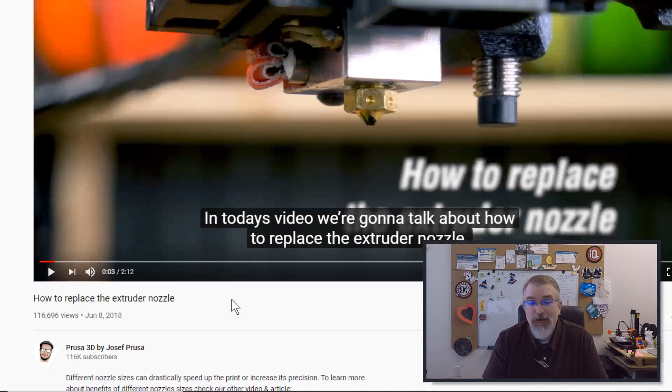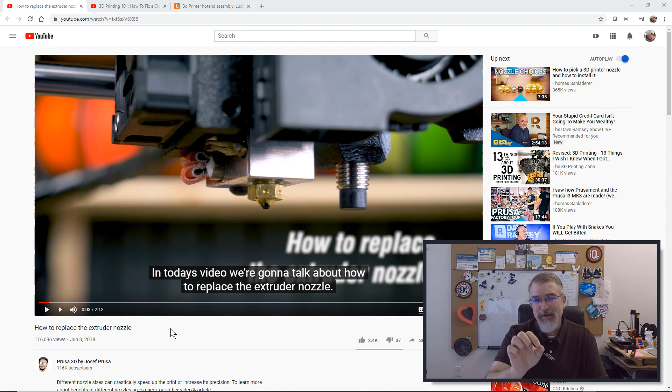Okay, before I go into this, let me show you some other resources that are out there. And one of the best ones you can probably find is How to Replace Your Extruder Nozzle by Prusa himself. So I'll put a link in the show notes here. It's a real simple, easy video, and I'll be doing most of what he's doing. He's got nice, crisp, clear views. So sometimes it's really nice to get a real good camera in there. They did a real good job. So you might want to go watch that video as well.

Another thing I'll be doing here at some point is doing a cold pull, and I'll go over that in a minute. But the 3D printing nerd has a nice video here on cold pulls and why you need to do that. So with all that, let me kind of go over what I am going to do.

So what I'm trying to do is I have my Prusa Mini over here. And I have my Prusa i3 Mark III that I just recently fixed the pulley on because I wasn't getting quite good prints on it. But I'm still not getting really good prints on the surface. And so I'm thinking there might be a problem with how the filament is coming out.

And for those of you who are new to 3D printing, here I have a little sketch of the schematics of the heater block and everything coming out of here. So just to go over how everything works, here at the top where your filament is coming in, there's this long plastic tube. In that plastic tube, we have this aluminum heat sink, aluminum fins that are trying to extract any extra heat that comes up.

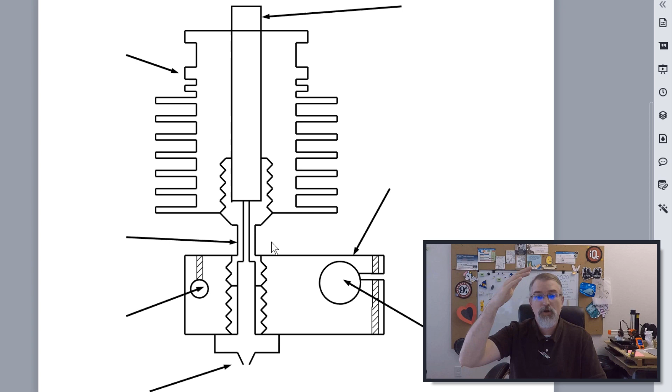And then attached to them, there's this little metal piece right here that has threads on either side. It's kind of like a little tiny thin piece, and that's what you see popping out there. And that's called a heat break. It's trying to keep the heat away from going up, making sure not so much heat is going up here.

And then down here is the heater block. You'll see this square aluminum piece down there, and that's where it tries to put all your heat. Now in the heater block, you have the nozzle screwed in down here. And you also have the heating element over here, that's the bigger knob. And over here you have a heat sensor, a thermistor. So it's trying to detect the heat, and this is trying to provide the heat.

Now, what can happen is, your filament is flowing through here just fine and coming out at an even rate, and everything is working well. But what happens if a little bit of dust or some specks get in there and get stuck, especially near the nozzle? That might build up a little bit over time, and it might not come out as well.

Now, right now, I don't really need to do a cold pull. Mine's working. Maybe I do need to do a cold pull. But I'm going to do a cold pull, and I'm going to replace the nozzle because I want to get it to a really nice state so that I can start comparing the Prusa Mini to the Prusa i3 Mark III side by side and see how they're doing prints compared to each other.

So in a cold pull, you would heat this thing up, and you could push the filament through, make sure it's coming out. And then at some point, and there's different methodology to this, I'll do what I've done in the past, but I haven't done it a lot. So you might want to look up some other people's techniques.

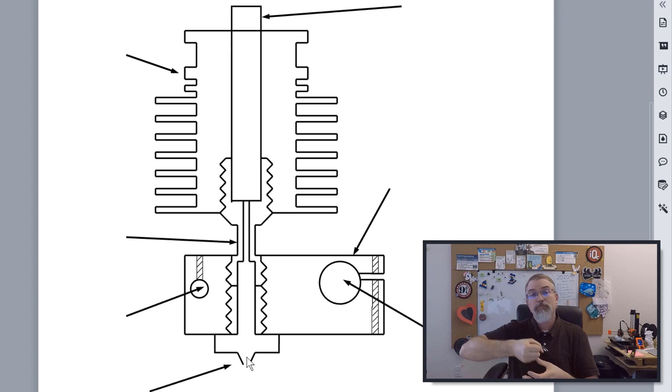But then you let it cool down a little bit to where it's more solid, but you don't let it cool down all the way. I've heard 100 degrees C or 60 degrees C. And then you do what's called a cold pull, or some people call it an atomic pull. At this point, it's fairly solid all the way down, and you pull it out. It'll hold on to any junk in there, and you'll pull it out. In fact, the end of the filament will be shaped like the end of the nozzle.

And that's kind of cool. I've done it once or twice. I haven't had to do it much. And it can clean the gunk out and hopefully clear things up. So I'm going to do that just to clean things up before I replace the nozzle. So I'm going to pull all that filament out.

And then what I'm going to do after that is I'm going to follow kind of what Prusa recommends, heat this thing up to 285 degrees, and then remove the nozzle. So to remove the nozzle itself, you need a 7mm socket wrench. And so I have a socket wrench here I just bought that I just used for my Prusa. And so I set it aside so I know that that's going to be right and be the correct size.

And then you can use a crescent wrench, but I was a little lazy, or I shouldn't say lazy, I'm paranoid because I had an issue. So I got a 17mm wrench that I just used to hold on to the heater block. Because when I first had my Prusa, and I have some videos out there, I was trying to replace the nozzle or do something, or I was still having issues with how I originally set it up. And so I was trying to take this whole thing apart to figure out what was going on.

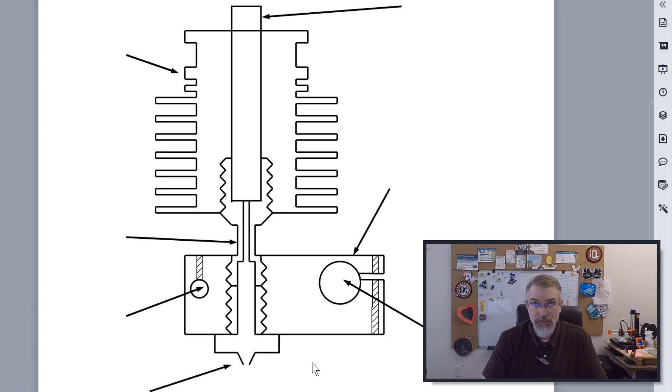And when I did that, I took not needle nose pliers, I took vice grips to hold on really tightly to the heat block. And when I did that, I accidentally squeezed my heat filament, or maybe it was my thermistor, and I broke all the wiring to it. So I just ripped it to shreds because I was being a dummy. And so I had to put some videos together showing how to replace that whole thing, which is not something you want to do.

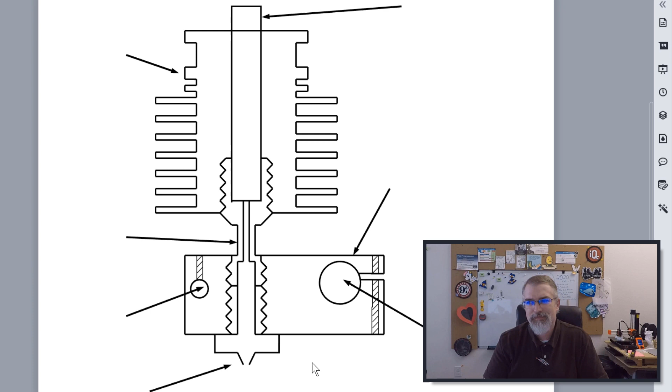So I use this now to gently hold on to it and kind of avoid that problem. You definitely don't use vice grips. A crescent wrench is fine, but either use a crescent wrench or just use a wrench that's the exact right size. And then once you heat it to 285 degrees, then you pull off the nozzle, put it aside, and put the other nozzle on. And it's just about that easy.

Now, with this, you need your nozzle. So I have an E3D V6 genuine 0.4 nozzle. If you go to buy nozzles, know what you're doing. If you're just starting to fiddle with it and you don't want to do any special changes, make sure you get a 0.4 millimeter nozzle. They have nozzles with different sizes, so they go higher and lower. The smaller they are, the finer print you can do. And the bigger they are, the faster but less fine print you can do.

But when you do that, you need to make new G-code files to account for it. So if you don't want to do anything, stay with the 0.4. If you want to go to a different size, that means you can't print the same prints you've been printing. You have to re-slice them into a different G-code that can account for the fact that you have a different nozzle size. So with that, let's go out in the garage and get this going.

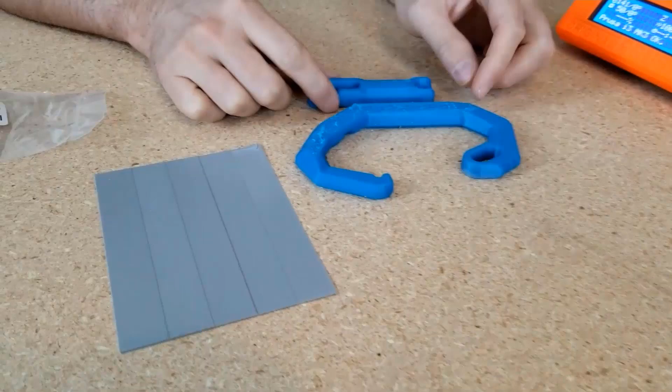Okay, so aside from getting the Prusa up to speed, I want to get the i3 Mark III in a good state, like I said, to compare to the Prusa Mini. But to show some things that have recently happened, I did go to print this recently, and I had this failure. You can see how it stopped off. Now that might be symptomatic of it not coming through quite smoothly.

Probably not, because what happens is at the top here, in this example, we've got 2 gears, and it's pushing that filament through. And so what could happen is if all of a sudden something stops it and it can't push through for a second, the gears will keep moving, and it will start to strip the filament from the sides. And once it strips enough, then it has nothing to grab onto. And so that's what occurred here, it's trying to push stuff through and it couldn't.

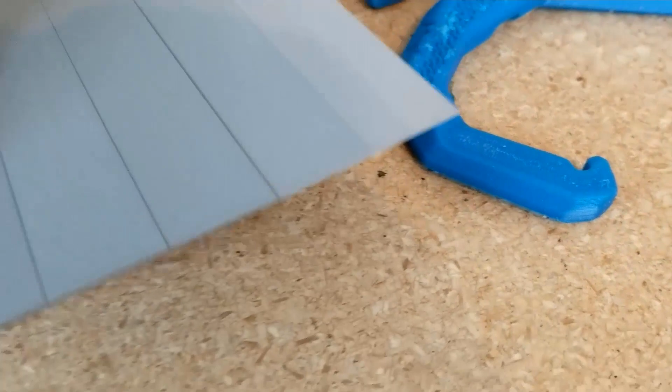Another thing that happened, and this is really hard to see because this is a strong B as far as quality. It's doing really fine. So I did this little print because the surface hasn't seemed quite right to me recently. If you look, you can probably see here, the surface might be a little notched when I'd rather have it smooth. It's probably really difficult to see because it's pretty good, but there are spaces here where it's not quite as evenly covered.

So you might be able to see that. I don't know how well it would show on the video, but it's good, it's not perfectly nice. So hopefully this will fix that too. That's another reason to do it all. So with that, let's start doing this cold pull and get it running.

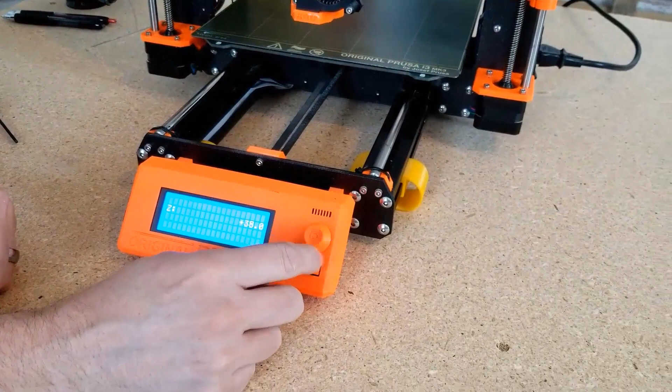So I've got my Prusa, I need to, Prusa i3 Mark III. So I'm going to preheat it and get it on PLA. And one thing, if you're new and don't know this, if you push and hold down this button, now you have your Z-axis controls. And so I can easily maneuver this and get it up. In this case, I want to get it up high so I can get to things easier. Now be careful going too high because it still keeps going as it goes up. So I'll get it about there.

And then now I will load it, which is going to take a few seconds as it heats up here, because I want to push this current filament through. And then we'll do a cold pull, atomic pull. But again, probably watch some other people's videos because I don't do enough of them, so maybe some other people have better techniques. Okay, press to load, so we're good now.

So now we'll press. I've already done this before. I just want to make sure this is coming out. Looks like we're coming out just fine. Because I want to make sure it's all through there so we can pull it out really well. So now it should ask us if it looks good in a second. Okay, we'll say yes.

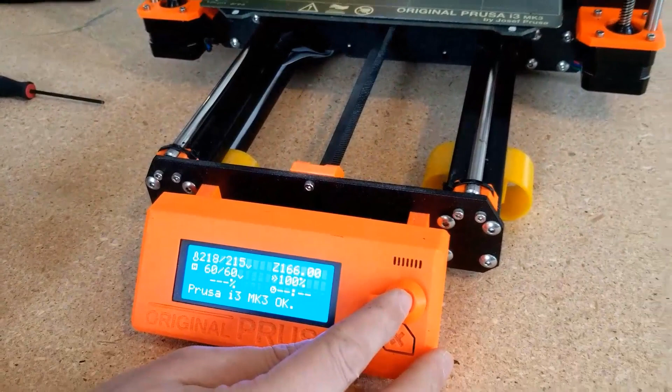And what I'll do now is we'll go to that preheat. We're on the PLA, so I want to stop the preheat. Easiest way, I'll just hit the cancel button here, which is going to reboot everything. And so now it'll turn off its heat. And now I want to let it cool down a bit. So we can see the nozzle now is 218 degrees. And so I'll come over here and I will cut this. And I want to let it drop because right now it's still hot on that hot end.

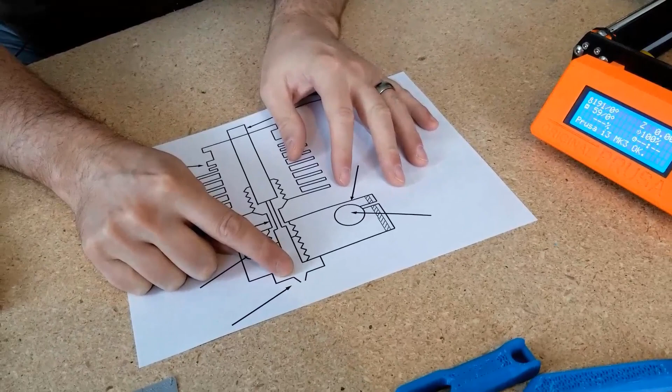I can show you my little printed out drawing. So right here towards the end, this is all liquid goo, so it's easy to push through. But as you go further up, especially all the way out, it's not goo at all, it's filament. So it goes from solid all the way down to liquid here, getting gooier and hotter the further it goes down. So we want this all to cool off, but not quite to a solid, because if it's really solid, it'll be harder to pull out.

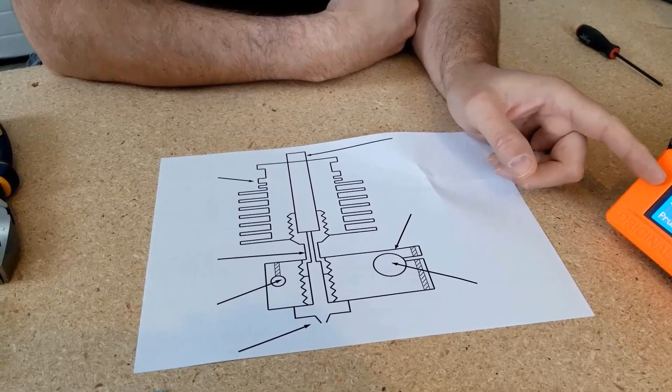But I've heard different people say different things. I've heard 100 degrees C, I've heard 60 degrees C. Last time I did this, I think I did it at 100 degrees C. And now I'm actually in the garage. It's a cold day here in Colorado, so I normally don't run my printer in the cold garage. Don't do that. I just needed a place to do this demonstration. But you can see mine's dropping pretty quickly because it is a cold day.

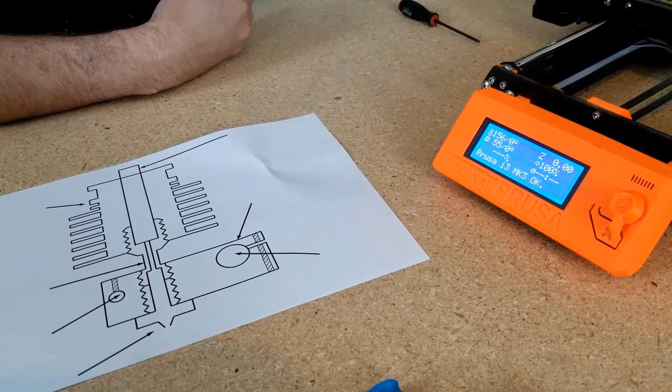But once it hits 100 degrees Celsius, I'll probably give it a moment, and then I'm just going to pull this whole thing out. It'll be solid at the end, but it should be a little softer, so it's easier to pull out. When I pull it out, you should see roughly the shape of the end of the nozzle. So the end of this will be pointed, and if there's any gook in there, you'll kind of see gook on there.

Now, I've seen videos where people actually run it multiple times. I've also seen some videos where people use clear PLA or PETG so they can really see the color of the gook coming out. I haven't done that because my main point is to just clean it out a little bit and then replace the nozzle completely. So there we are, 128, still going down.

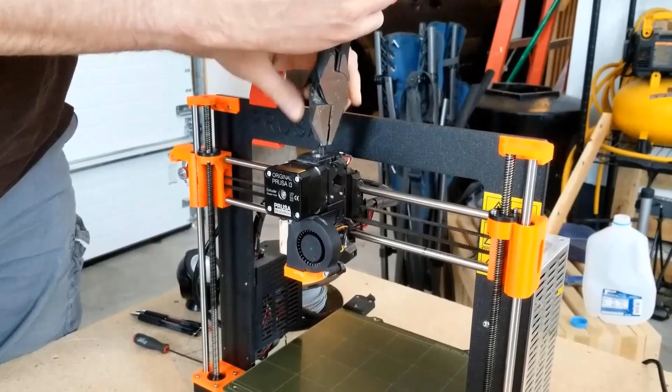Okay, there we go, 100. So we'll see how well we do on this. You can probably pull it by hand, but I'll just get this on here, and yeah, it's pulling pretty easily.

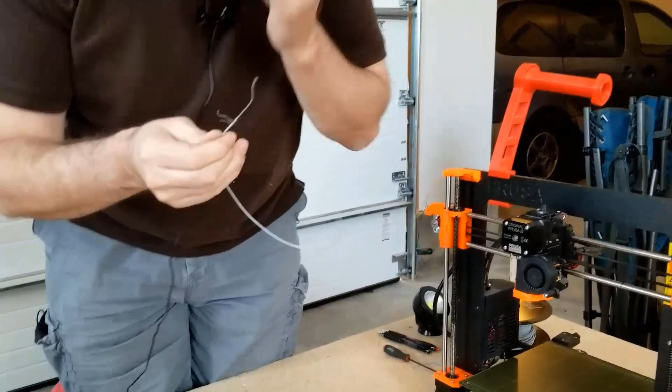There we go. And see how it does on its shape there. Let's see, I do a white background here. And so you can see, there's the end. Now, yeah, it might make a little more sense to do this in a clear plastic so you can see the color change if you really want to get the gunk out.

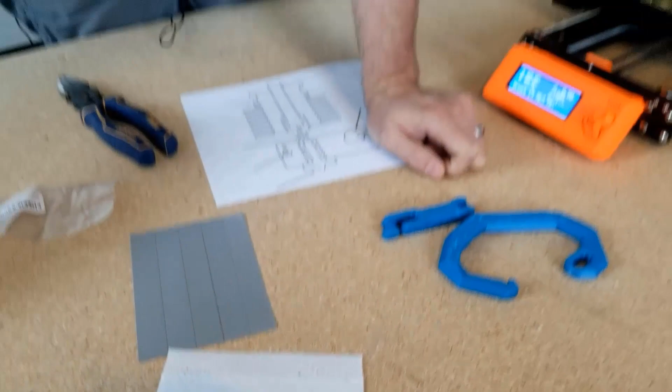But you can see I've pulled, it's retaining the shape that was down there. So it should be pretty clear now. And if you're worried, you could repeat this process. Now, in this case, I'm replacing the nozzle, so I don't really need to repeat the process. So, with that, let me do some of the next things to replace the nozzle.

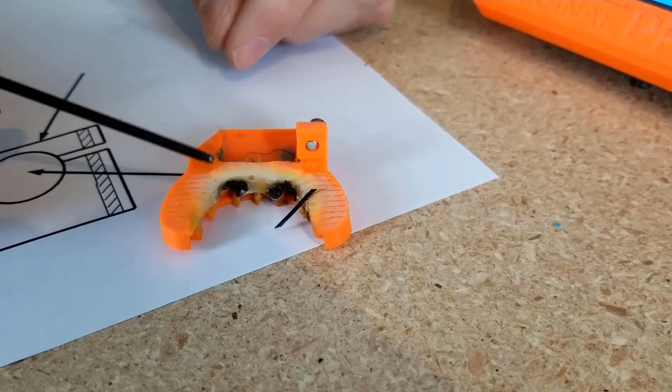So first, I'll take this guy off. This little fan here. The fan redirection. Of course, be careful because my finger here is next to something that's still 80 degrees Celsius. And this probably needs to be clean. I probably should print a new one. That one's looking a little ugly over the years. So, probably a good idea to reprint another one of these. Yeah, it's ugly. It needs a new one. But for now, I'll keep using it.

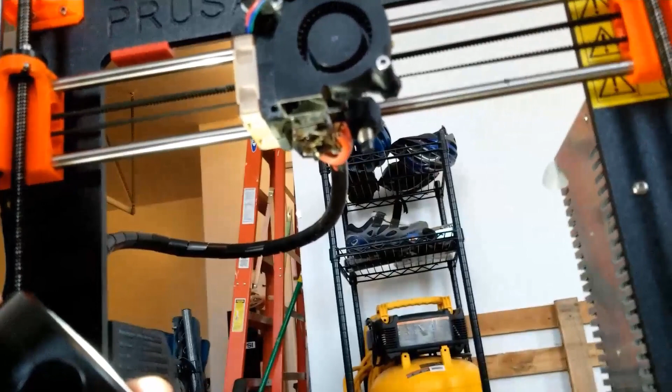So now, if we look under here, we can see here is the heater block. I know it's a bit ugly underneath there. Might be going to get an additional light. So it's been uglified over the years, but it's still functional. Now, if you need to, you can replace the whole thing. And you can see the attachment. Let me get on this side so I can point it out easier.

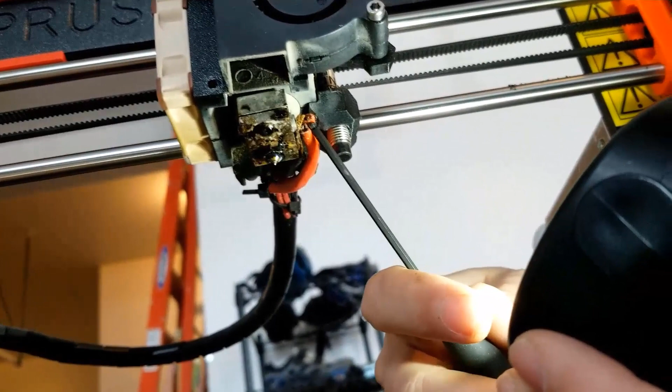Over here, you can see all the wiring. So this big mama jam over here, that's the heating element. Here we go. So this is the heating element. And then behind it, there's a smaller hole on the back side that I showed in the image that is the thermistor. You want to stay away from these guys because if you break them, it's not something you can easily resolder because it's hot there. So you just have to replace the whole thing, which I did once. So don't be a dummy and break things like I did.

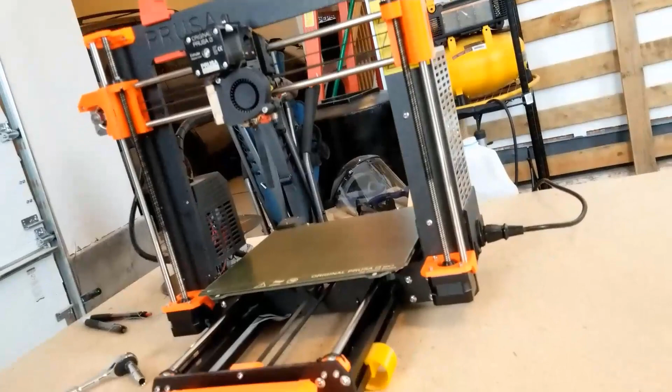Oh, there you go. So now what they suggest is they want to heat this up. Let's see, settings, let me go back. Okay, so now Prusa is talking about setting this to 285 degrees. So I'll go to settings, temperature, nozzle, and pump that up to 285. That's Celsius? Yes. So for us American people, that's hot. And so I'll go back to main, go back to info, and we can see it's heating up.

So we'll wait for it to get to 285. When you take this off, this will be 285 degrees Celsius. So if I put it on this paper, it'll probably burn a hole in the paper. So you can probably grab a tile. Let me see, do I have anything nice and metallic around here? Should have thought of that beforehand, but while it's heating up, I will go find something in my garage that's metallic and big. Ah, there we go.

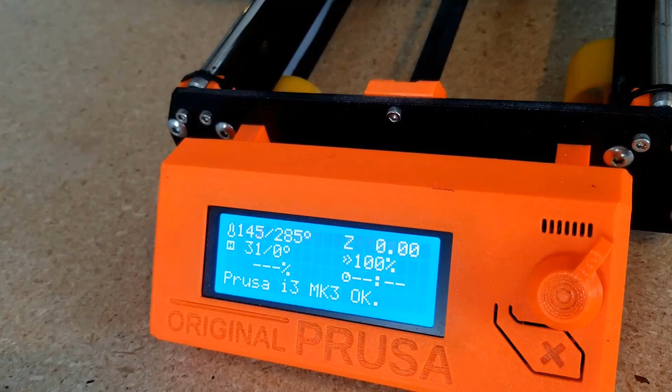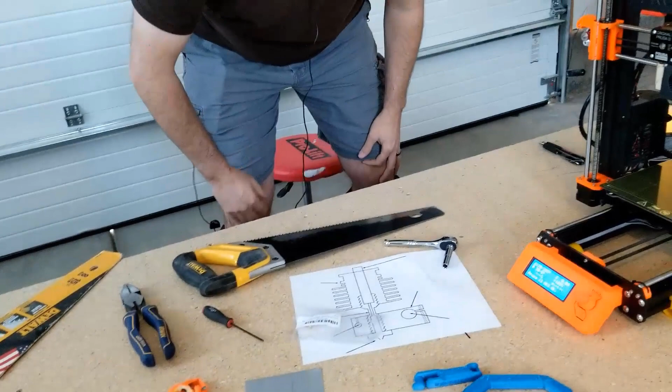I'll use an old junky saw. That'll work. Here we go. I have an old junky saw I can place it down on. But it's so small that I could probably put it on this wood and it would be okay. But if I threw it in a bunch of sawdust, I might have a fire all of a sudden, right? So play it safe. I can take it out, but it's obvious which one's which, because this one's nice and clean. So there's that one.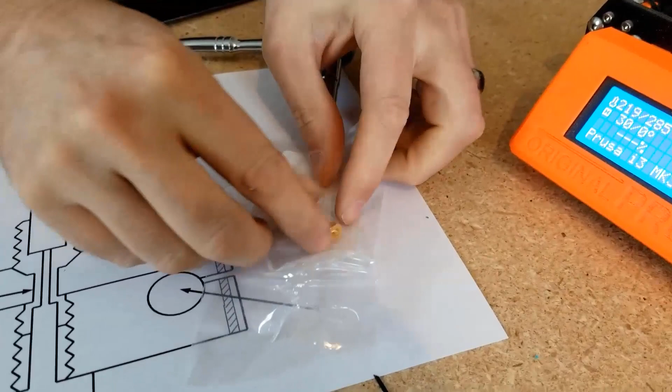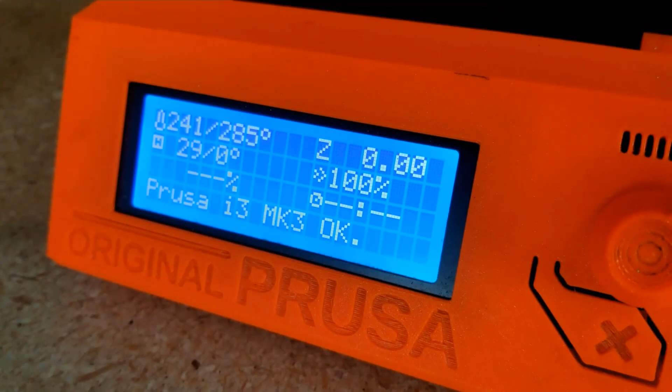And now when you put the new one on, you don't want to crank it on super tight, you want it snug. If you get it on there too tight, it pushes up against this heat break and you could do some damage. So you want to get it on there snug, you don't want to just wrench it. Okay, 271, we're almost there. Okay, there we go.

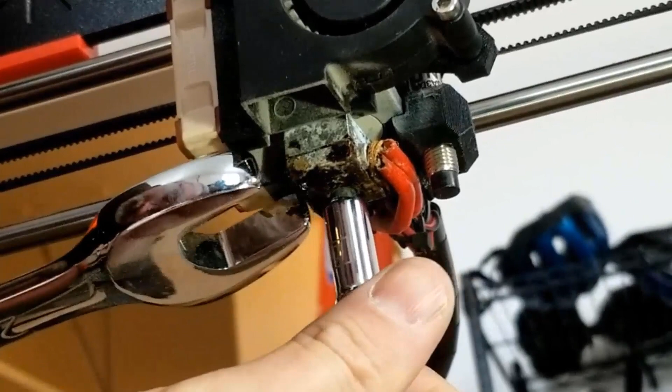Now for me, I didn't want to mess with this because I did such a bad job on it years ago that I have this 23mm wrench, like I mentioned before, that is the exact size that I can put over here without having to use a crescent wrench. And remember, everything in here is really super hot right now. So if it drops, get your hands out of the way. I need to get a better light. Okay, and we are out.

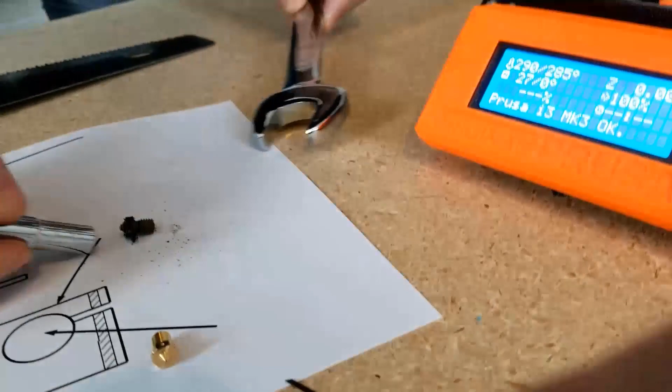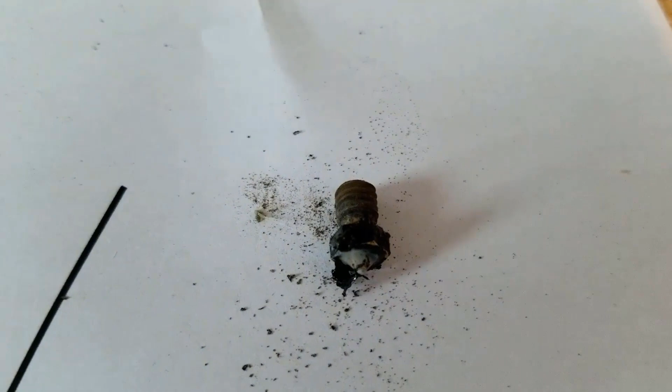There we go. Don't touch it. Oh, I put it on the paper like a dummy. But again, don't do what I just did. I should have put it on the metal. That'll probably leave a burn mark. Okay, yeah. Hold on, let me get that up here. My fingers.

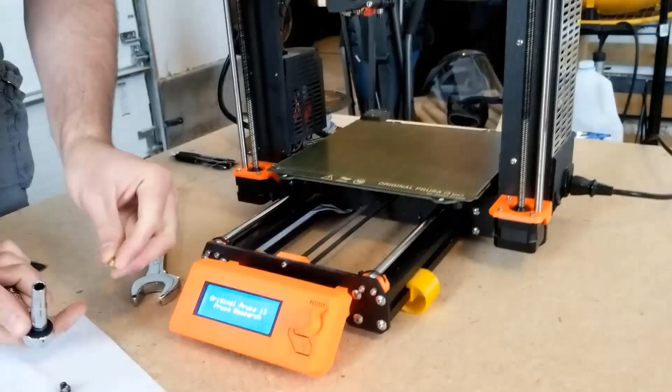Now, I need to, well, my socket's too deep, so I'm about to do something dangerous. What you should do, okay, maybe I should not do this dangerous. I will go here and hit the cancel button. My socket, see, my problem right now is my socket's so deep that if I put it in there, I can't start it. Once it gets started, I'm okay.

So you're going to cool it off and start it? I'm going to cool it off. You should get a shallower socket or cool it off all the way. I'll cool it off to a reasonable thing, well, it's like touching a stove. If I touch it right now, I'm going to burn myself pretty bad, but it's only going to be my fingers and I'm not going to die. But you don't want to burn your fingers, right? So let's do the responsible thing and not hurt ourselves.

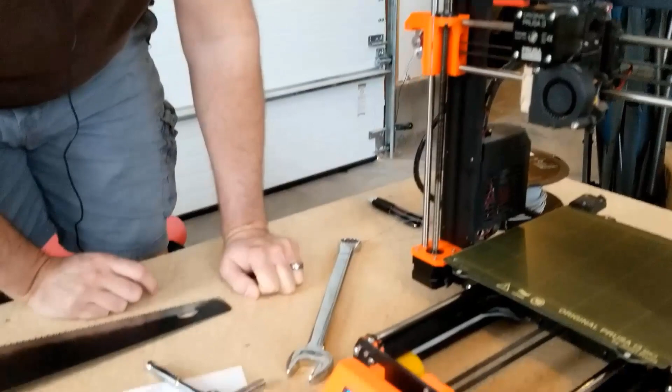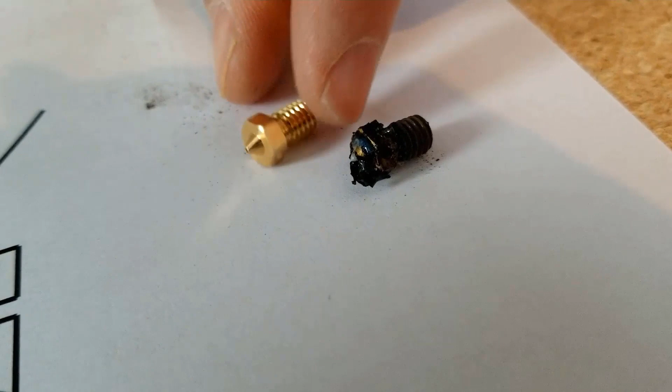Did we burn it through? We didn't. No, it's so small. So now it should be fairly cooled off. It's so small, and yeah, it's gotten pretty. So it started out like the other one. Yeah, it started out like that, and I think I've only replaced it once, so that's probably been on there for a year. So it's gotten used and abused.

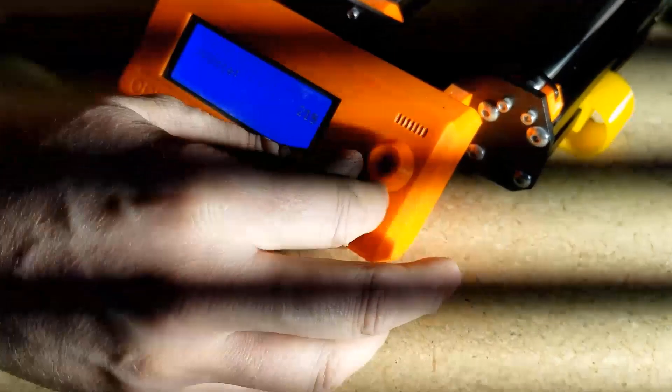Okay, so now we've cooled off pretty well. But it's still hot right now, so I'm just going to get it started, just barely. Right now it's like 80 degrees C, but I'm not getting anywhere near it even so. So I got it started, so now I'm good. Now I will get it back up again to 285. A better way to do this would just be to have a shorter socket. But we work with what we have, right?

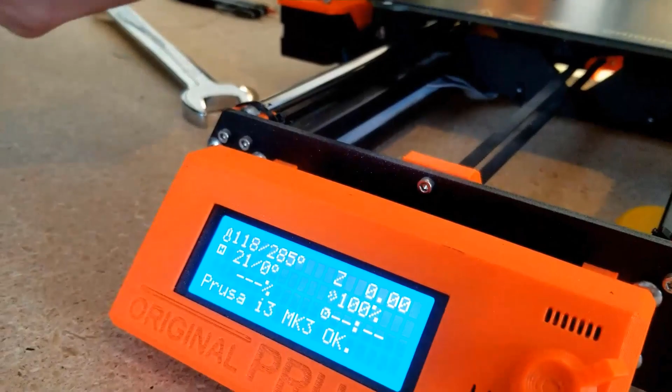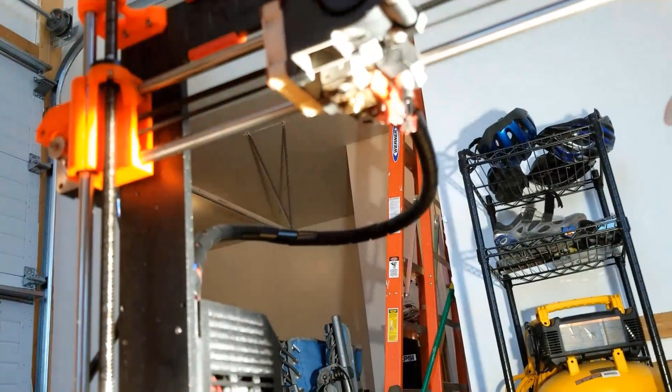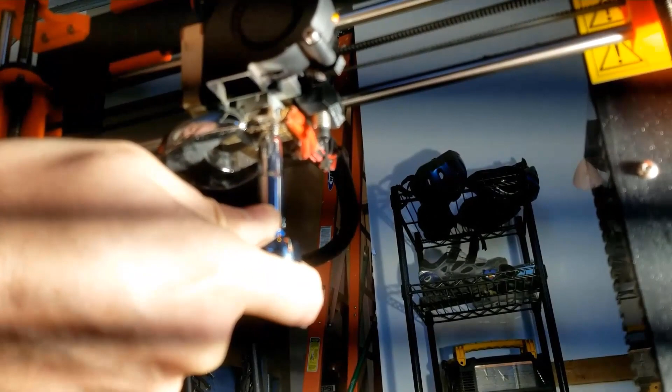Okay, so I don't know if it's so important that it's hot right now, but I will get it a little more snug. So it's just snug right now, and then I'll hold the block. And just get it nice and good and snug. I'm not torquing it. So now it should be good. So now I got that all going.

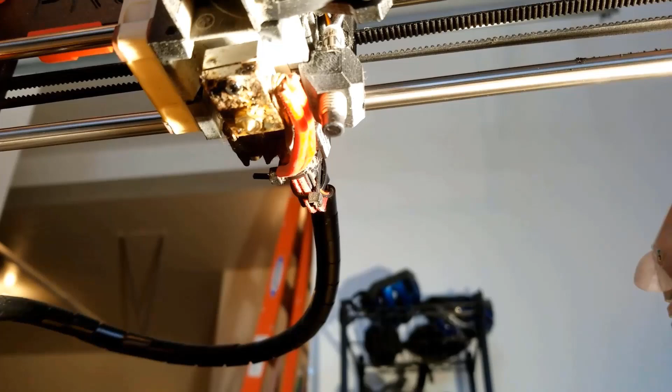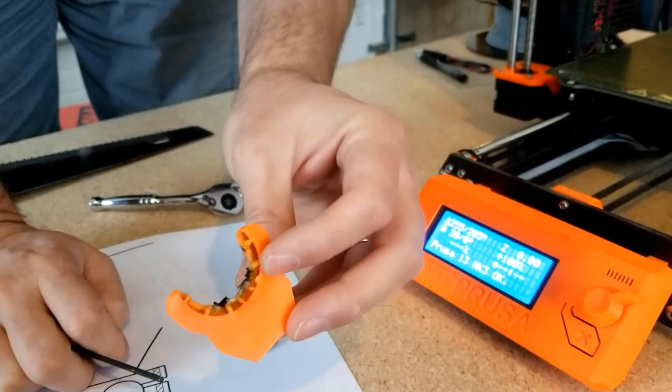Let me go run some filament through it just to make sure it's coming out fine. You have to put that on? Yeah, I should. You're right. Wasn't paying attention. I could put this fan back on, which I need to go make. Now that could be part of my problems too, because this is going to redirect some of the airflow to cool it off at the end, so that being all gooed up like that is probably not helping me. So I will print one of these out and replace it as well.

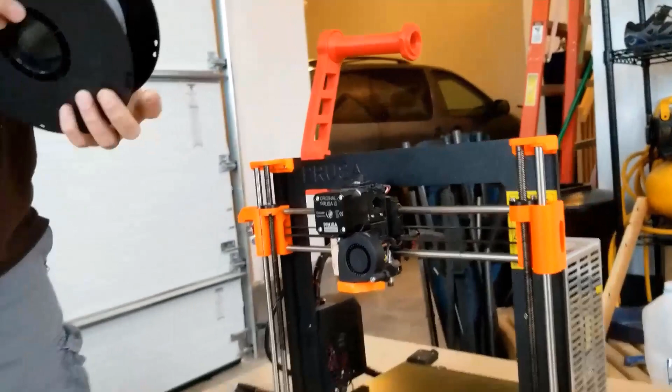Now again, this is hot here, but I'm nowhere near the heat source with my fingers. But you know what? That could be symptomatic of what's happening. This could be what's happening because this is not redirecting the airflow as well as it should be. So I probably need to print one of those out, but I need to print it out in PETG, not PLA. PETG can handle the hotter temperatures. And if I can just find where this starts.

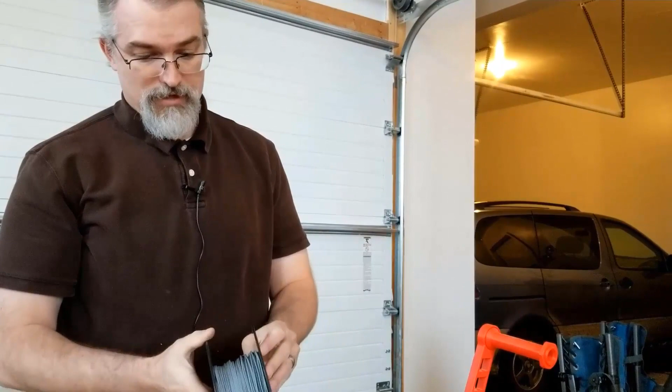Should have ordered one of those when you ordered the other. Oh, I should have. Yeah, I didn't think about that. I mean, when I'm ordering stuff from Prusa, he does a better job printing stuff out than I do, I would hope, and so I don't mind ordering some 3D printed parts from him because he only charges a couple bucks for it. So now we will preheat to PLA, and now it's technically too hot, but it'll come down pretty quickly.

But I should be able to load it, even at a higher temperature, it'll just kind of go through. So I hit the load button, and we should start seeing this come through. Oh, as it raises up on me. There we go. And I'll say no, because I want to push some more through just to get it going. There we go. I'll hit no again, just to make sure it's all going through just fine.

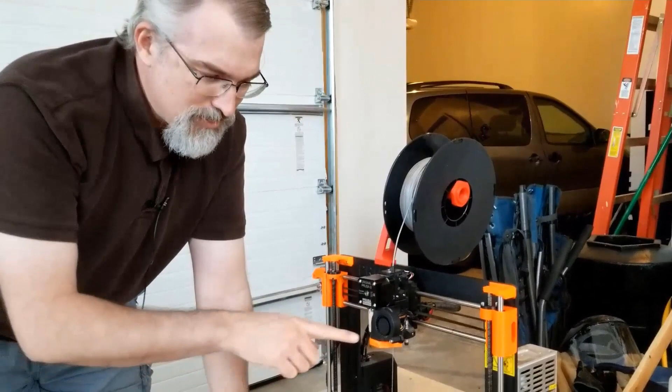So now I think we're good, but I am going to go print out a new version of this, because even if I'm having issues because of this, they're small issues that aren't going to affect how this works. But then I'll get that on and we'll see if we're doing really good prints again, and then I can start doing some comparisons between the Prusa Mini and the Prusa i3 Mark III. So, there you go.